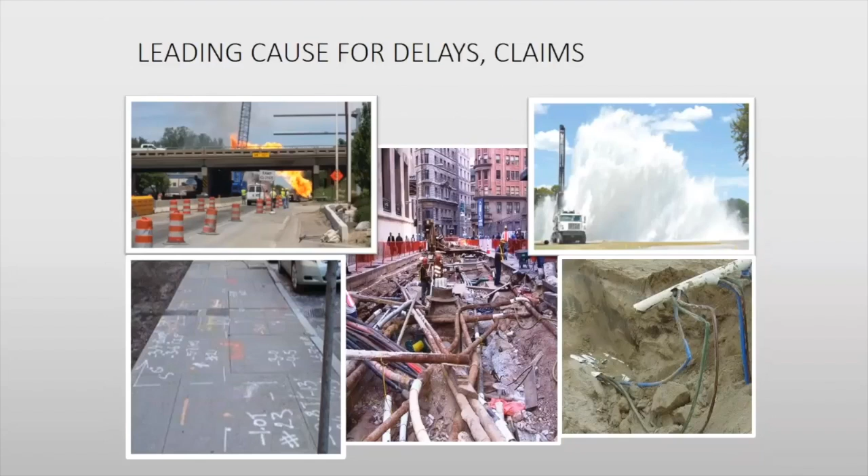It's a worldwide problem. So ASCE, basically the Construction Institute and the Utility Engineering and Survey Institute, got together—we actually started out of the Construction Institute—to come up with practices that would mitigate costs, save lives, and save money and time.

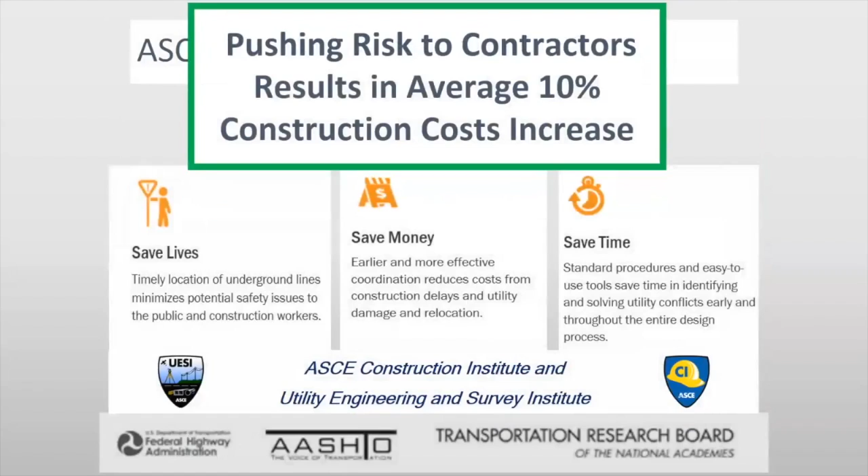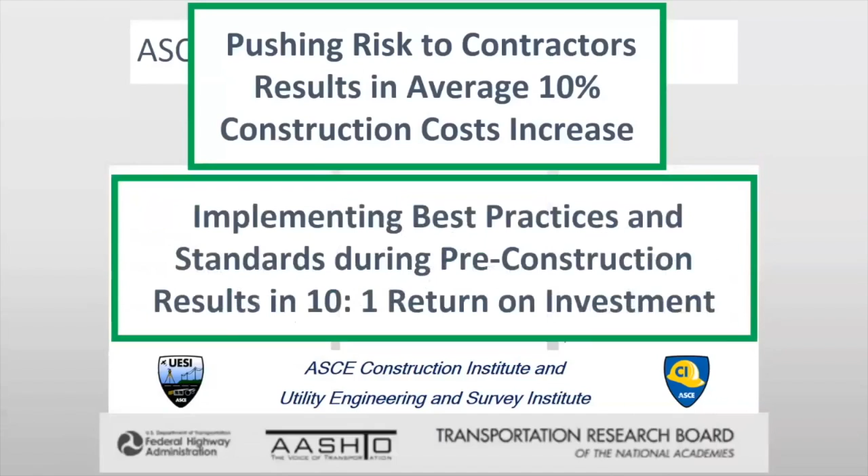The idea is to take the risk back, because when you push the risk to the contractors, they inherently put about a 10% contingency in their bid to deal with the issues. If we can deal with it up front, similar to the practices Drew is doing with his design work, we can achieve huge return on investment. I think Alan alluded to that.

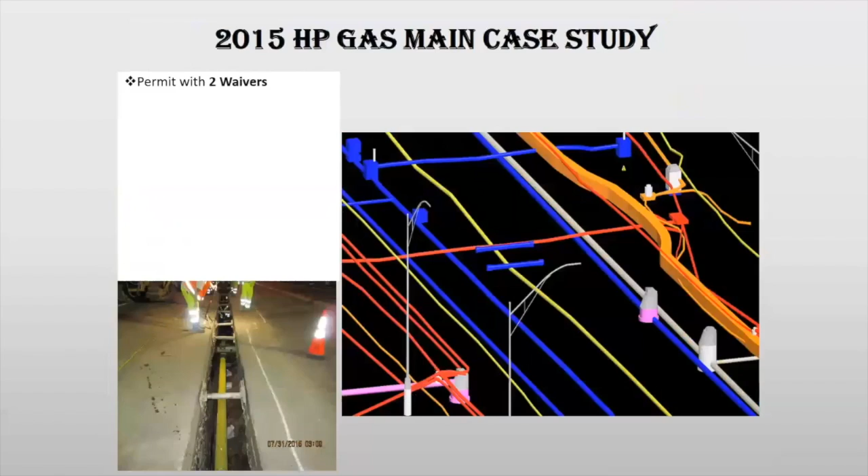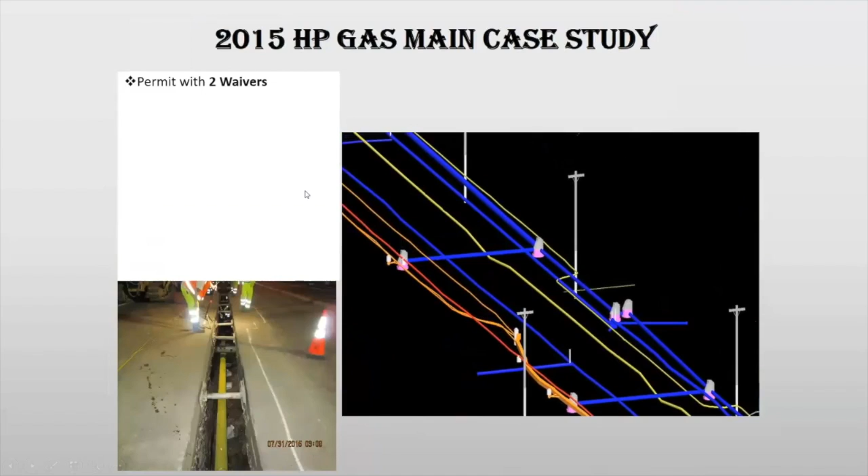This is a great example from 2015, only 4 years ago, of a 3D project where we used ASCE 38 to collect information. I just want to run through this. The project reaped huge benefit. One of the contractors that saw this information—we used ASCE 38 to collect the data and do all the conflict analysis, data collected by professionals.

Mike's going to talk about ASCE 38 in more depth, so I'll stay at a high level. But the bottom line is, you implement the standard, and the contractors looked at it and said, 'this is the best bid package you've ever seen.' We had that stated. The bids came in 10% below the engineer's estimate.

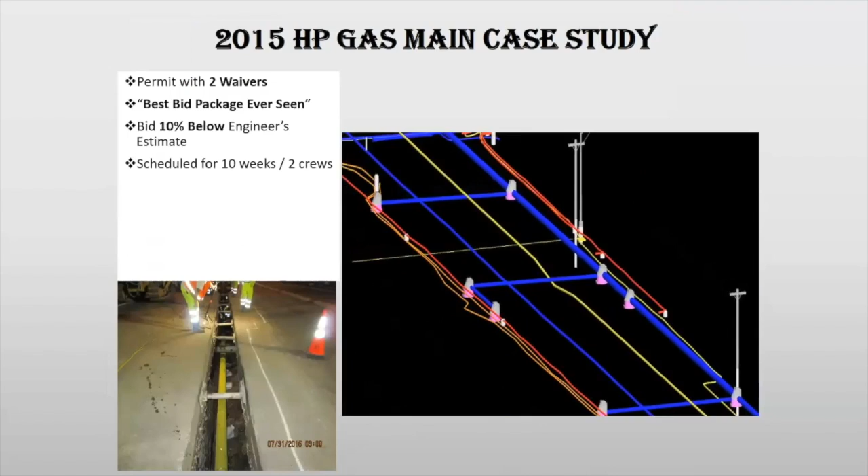This is a high-pressure gas main along a 1-mile corridor in Lacey, Washington. What was very impressive is that even the contractors didn't realize what they had here, so they still bid the work with 2 crews and 10 weeks to do it. But when they got out there, they were laying 300 feet of pipe a night because the information was all figured out ahead of time.

The risk was out of it. Everything was exactly as it was designed in 3D, and so they built it in 7 weeks with 1 crew. Now, you do the math on that—it's incredible. There were no damages, no change orders—that was another first—and no delays. It was built exactly as designed when we were done.

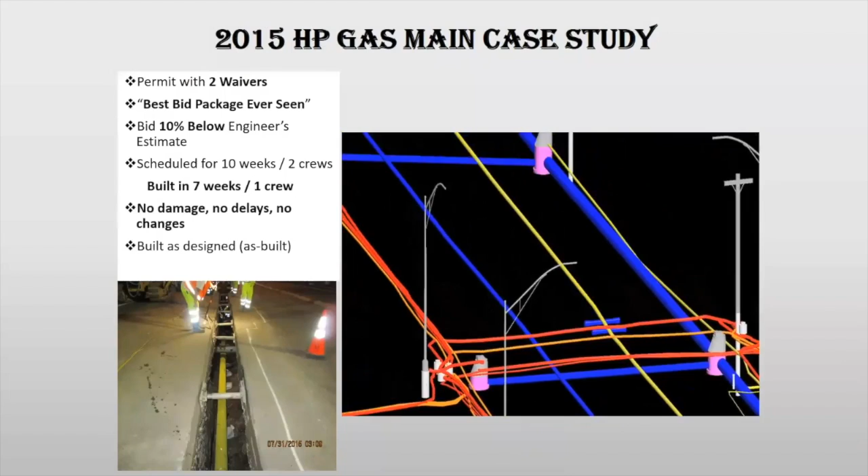ASCE 38 is a tremendous standard. It elevates the effort to a professional level, instead of the willy-nilly effort that was done in the past.

Now, what's interesting is we need policy change—my timer's on, I'm sorry. The state of Colorado, this has been adopted as a best practice around the country, but the state of Colorado, just in August, passed Senate Bill 18-167. They've actually made it a law now, requiring ASCE 38 on all project development. As I mentioned, Mike will talk about this a little later, but it's rocking around. It's going to keep me on timer.

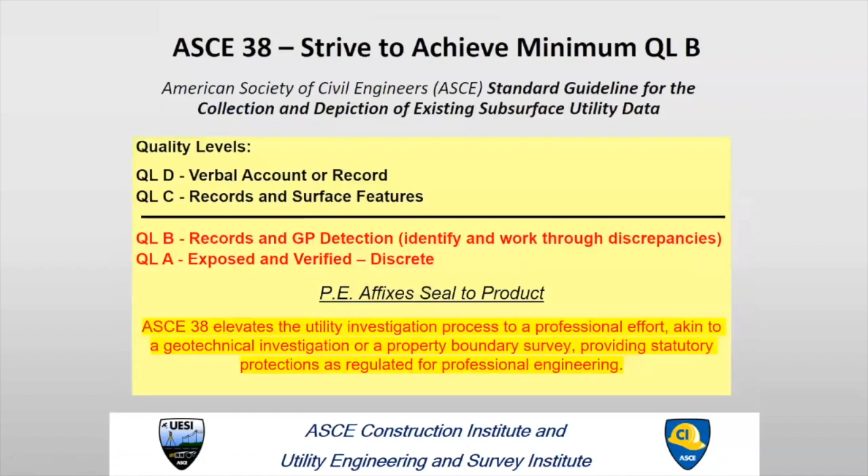The difference with ASCE 38 is it makes a professional engineer certify the product. That's because you're dealing with disparate data, public welfare, and protection of the public, and the statutes are well established for professional engineering to protect the public against malpractice.

Now I want to talk about two standards. ASCE 38 is one, and that resolves the symptoms of having bad record data. Nobody has good records, though some gas companies and water companies are getting better. But bottom line, there was a lack of a standard for as-built, so ASCE 38 was developed to address that.

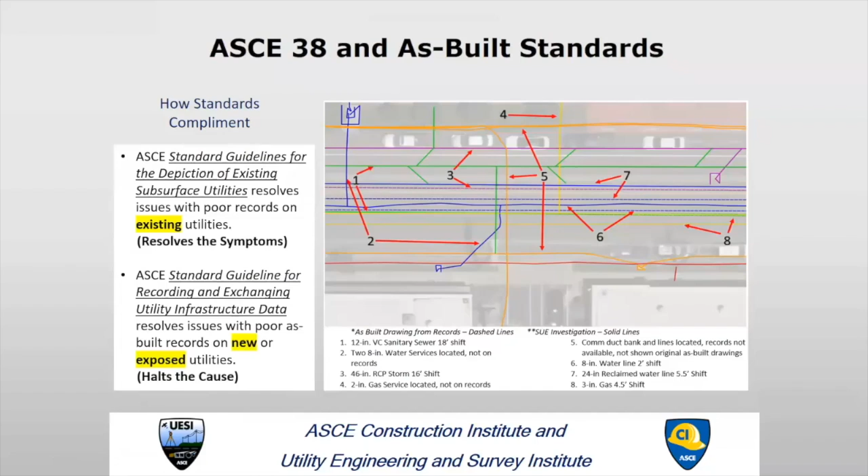This new standard, which I chair, is a standard guideline for recording and exchanging utility infrastructure data, an as-built standard. We've got DoD, FHWA, Federal Aviation, NOAA, Vermeer, Kiewit, Bentley, and Esri, and a number of players involved. It's a nice little standard, and OGC has adopted it as part of the MUDDI effort.

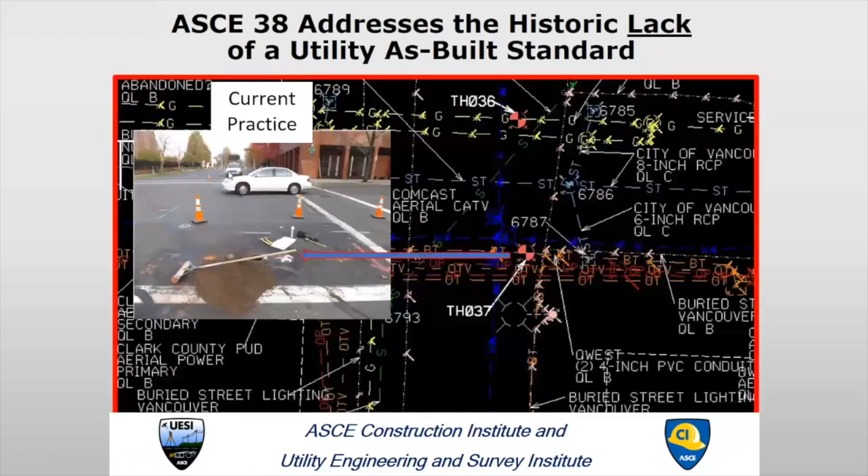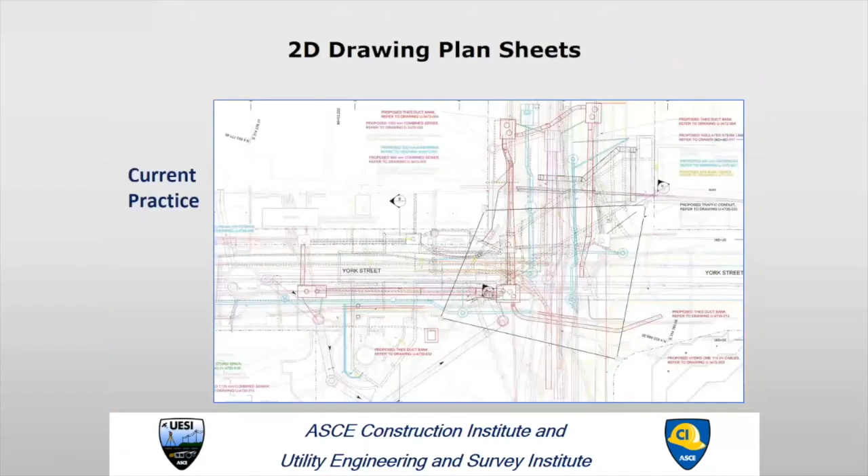The idea is to get from having to dig things up to find it, to keeping track of it when it goes in the ground in the first place. A novel idea. The other advantage is it might be better as a drawing—we want to go from 2D to 3D.

The as-built standard addresses how much data you need to collect to go from here to here. Now everybody can look at this and understand what's going on—you don't have to be an engineer. What's great is now it's easy, you put your Google glasses on, you go out and see the stuff.

I think you mentioned that—wouldn't it be great to be able to go out and see this stuff for damage or emergency response if you had that kind of data. So, with us or without us, it's like a Tom Cruise movie.

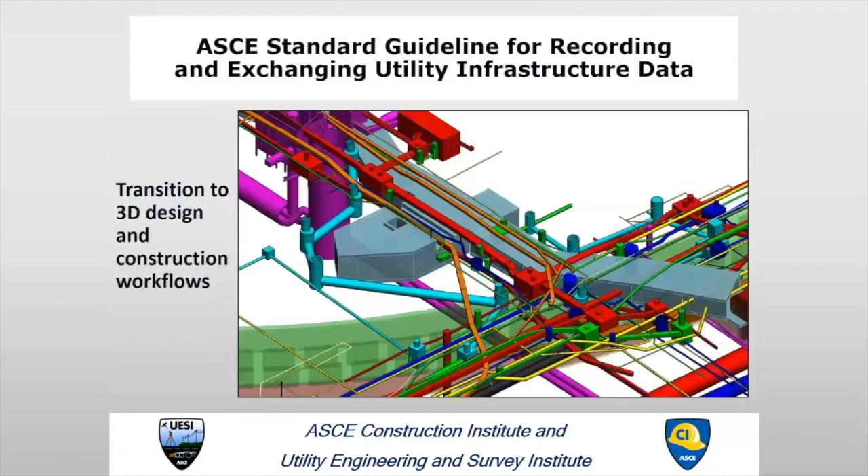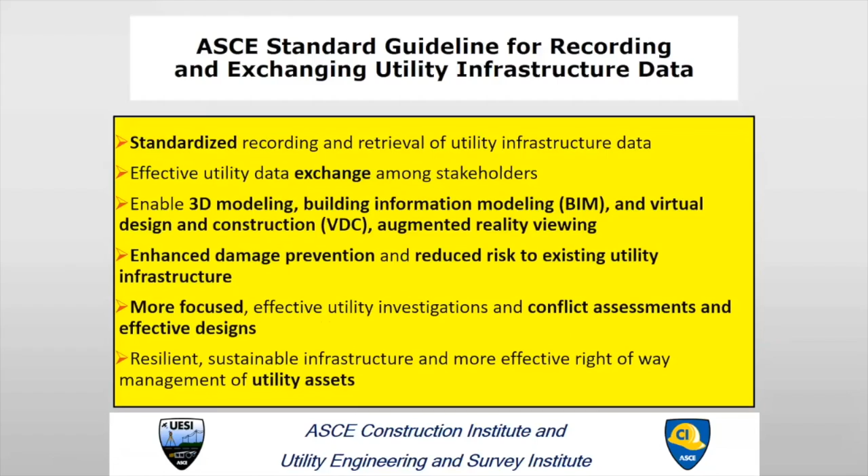The new standard for recording and exchanging infrastructure standardizes how data is recorded. It's going to make effective exchange among stakeholders possible. It's been 6 years in development now, and we're in the final balloting of it right now. It enables all the VDC things we want to do, and there's all kinds of benefits.

What's going on here is really exciting to me because you guys are going to leverage the data. So this is just showing some of the technologies.

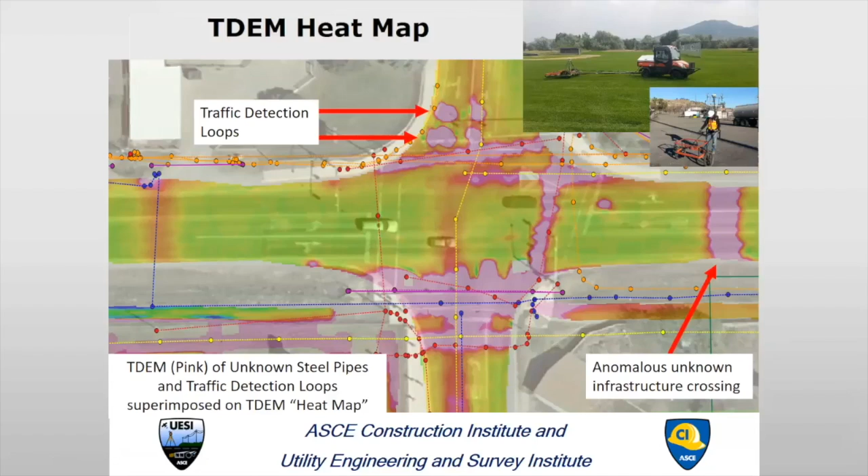One thing we're doing now that we couldn't do 5 years ago is using special geophysical methods—we can basically enable what CT scans and MRIs did for laparoscopic surgery. That's what we're doing for engineering. We can visualize these things now.

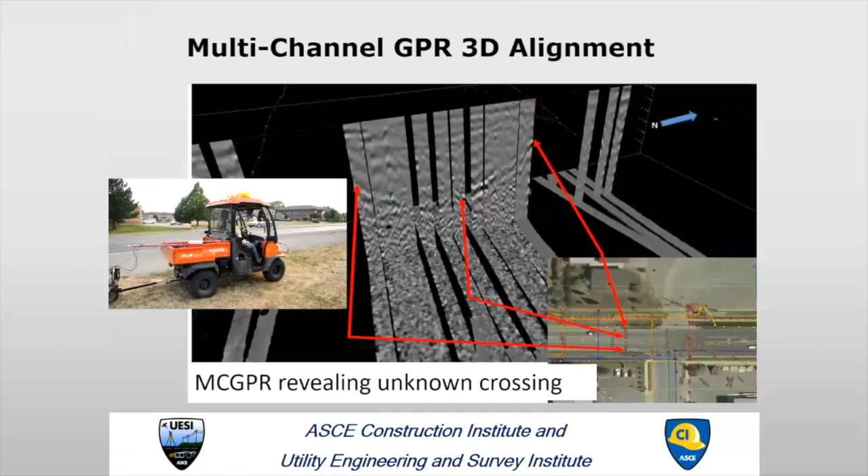But the key, and ASCE is trying to address this, is you have to have qualified people doing this work to collect and interpret that data. It's not something you can just hand off to anybody. You have to make sure you have pre-qualified people doing this—just like a radiologist, you don't want a technician analyzing that information and creating a model out of it.

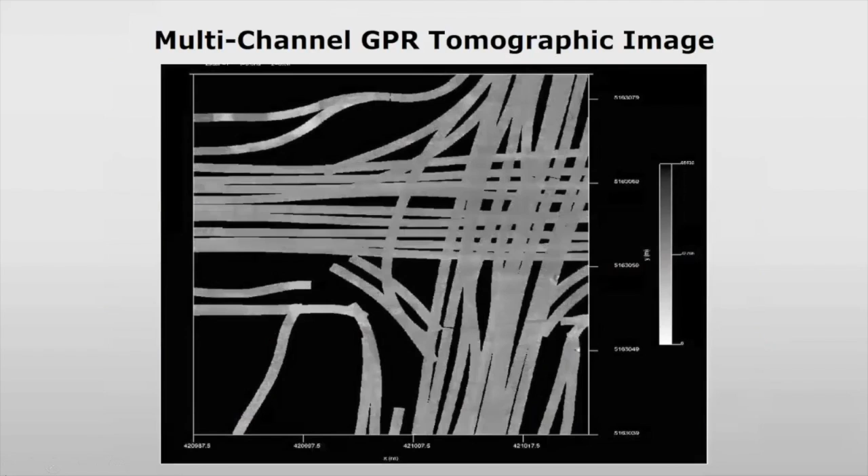So we can do things with this multi-channel radar. You can create tomographic images, basically looking at time slices in depth. This is showing how we're following a pipeline along in the radar here.

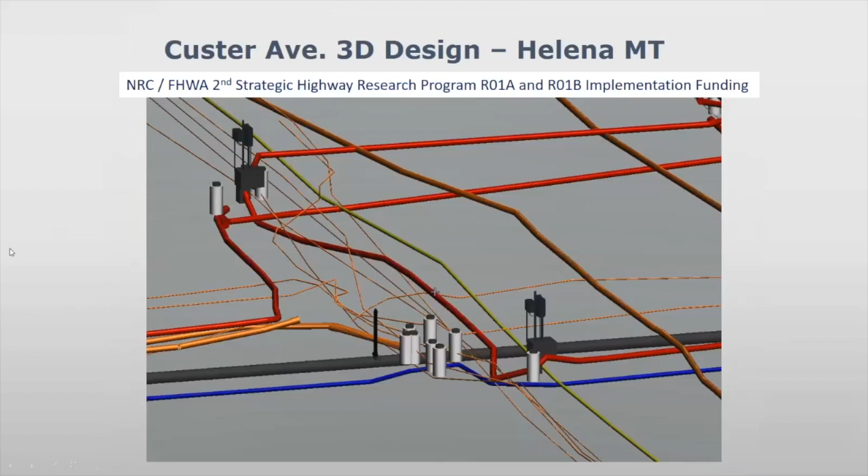I'm just going to keep going here. This is a project hot off the press—it was just done this fall, and this is in Helena, Montana.

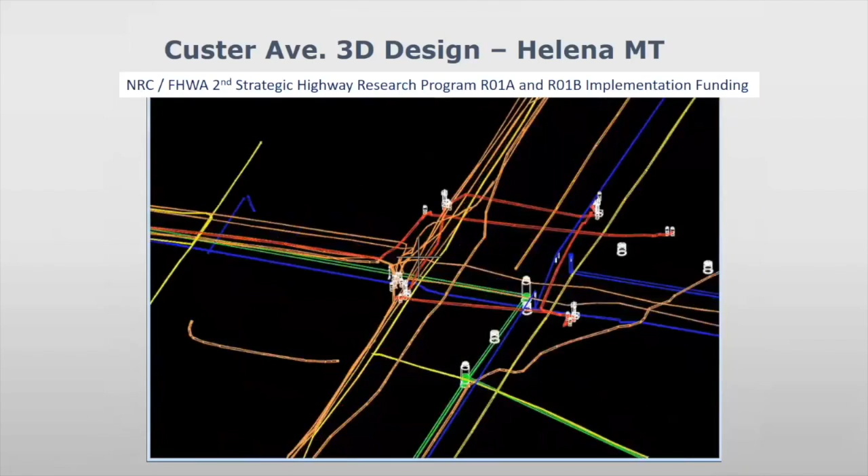It was funded by the Strategic Highway Research Program, which is a national research effort funded by the National Research Council. It's just to show how we could collect data and build 3D models, and it's really not that difficult to do with the information.

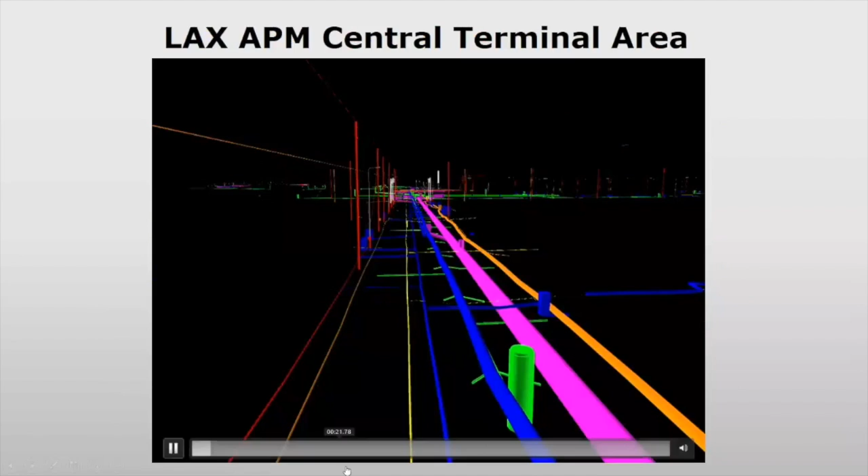And this is another project that was done. This is LAX, where this model went into the bid package. Now the key is, we're also using LiDAR and things like that.

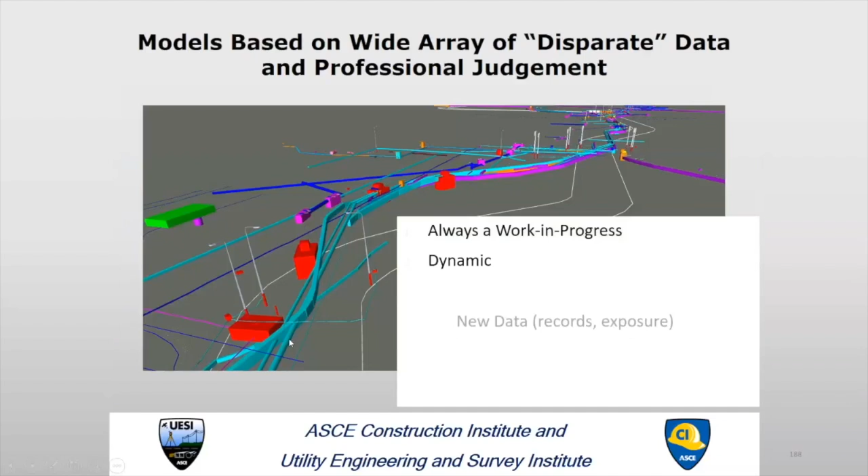So what you have to understand when you bring utility data together to build a model is it's not a trivial effort. You're going to have disparate information, and it's going to be a work in progress and dynamic, because people are constructing and you're going to get more data.

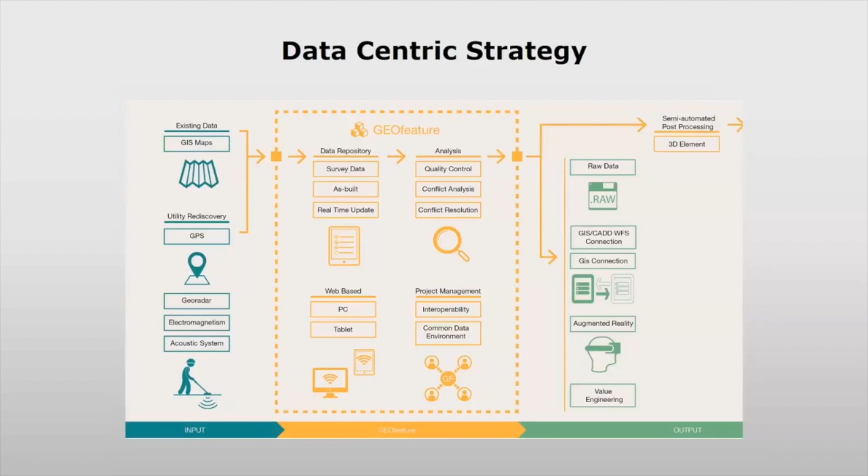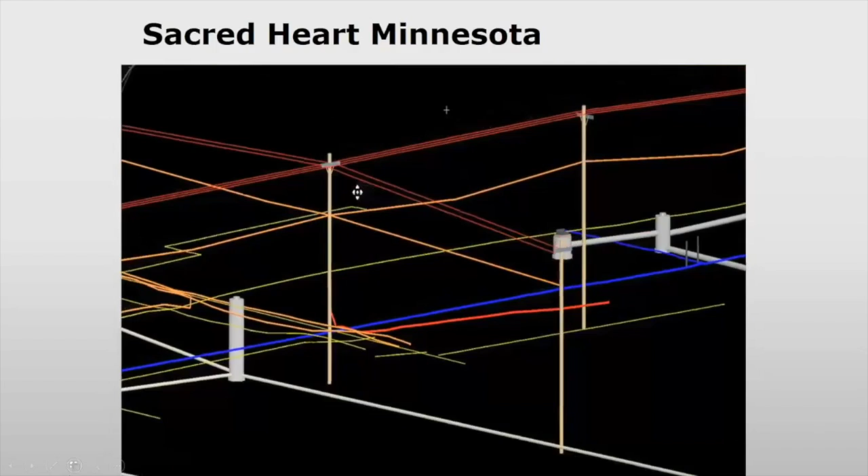You have to manage in a data-centric environment, and build your models. But also you have to implement as-built data so you're keeping your data current, because it's changing as you go along. Construction is going to change things. One of our major contractors said 70% of their strikes are on infrastructure that they actually installed themselves.

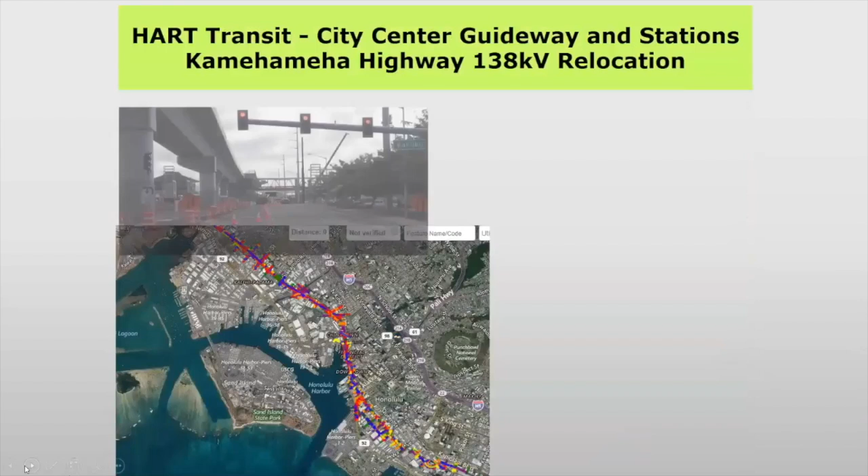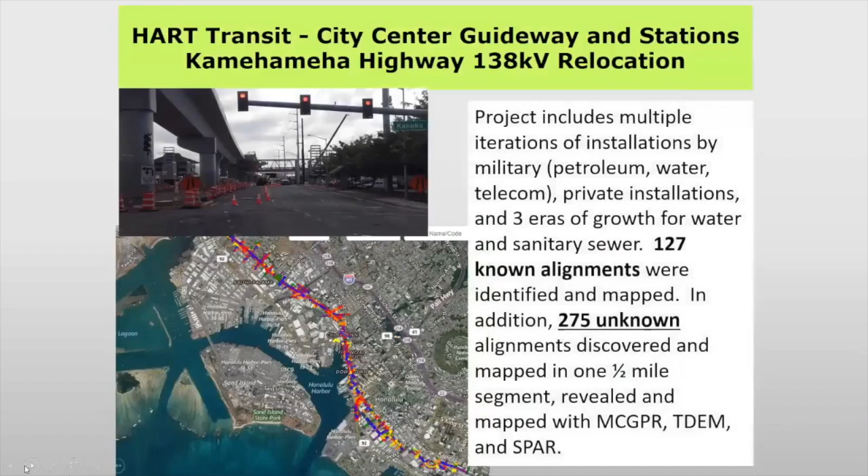So anyway, this is hot off the press, the Honolulu light rail project. What we can do with the data is not only identify the known infrastructure, but we're identifying a lot more unknown infrastructure, and having all this information up front makes the project go a lot faster.

These are just stats showing it. Alan, I haven't shared these with you yet, we just got these. But some more value - one of the challenges is going to be, how do you document stuff that didn't happen because you had this data?

How are you going to show the value of doing this when things don't happen because you had this data? So we'll have to figure that out.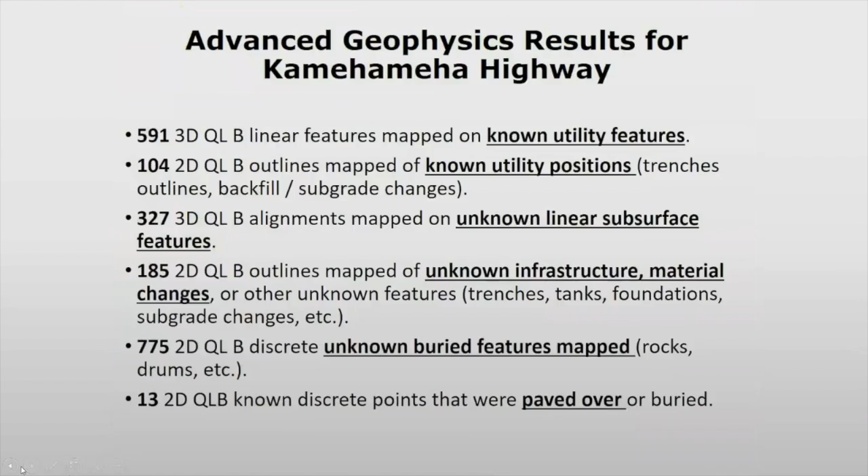Now, one of the things that happens right now with this information is when you push the risk to contractors, the bid languages are wrong, because most projects like light rail are pushing all the risk to the contractor. They're letting the contractor deal with it.

We're doing a potholing campaign, where basically they go through a hole every 25 feet digging everything up. And it's not written to incorporate this data early and actually include it in the project development. So we're not getting the value out of that.

There's a problem because people administering these contracts don't care. They think it's a utility problem, not their problem. Well, it is their problem because it's their project and it's going to affect all the public.

And then they think the utility should have this data. Well, we don't, because we didn't have a standard, and they think it's a contractor role. We've had prior bad experience with doing this, with radar and things like that. But again, the technology has advanced.

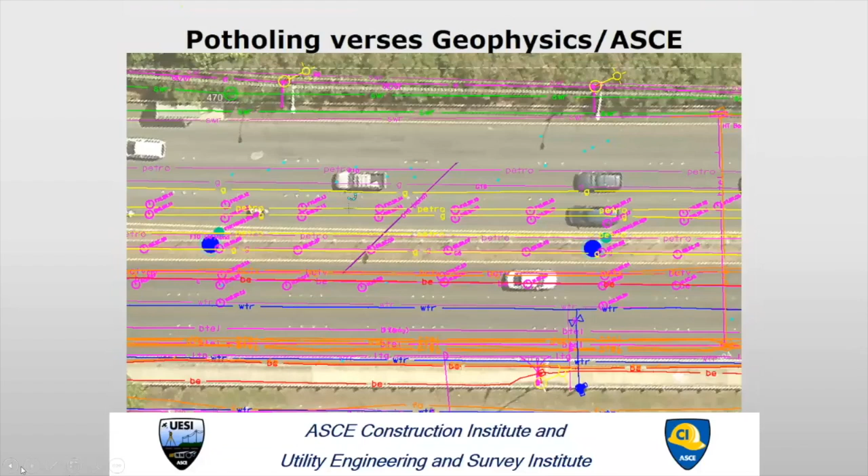But the keys are having good pre-quals and good bid language and things like that. So what we have to do is evolve our projects so that for a transit or light rail project, you get data, get it leveraged for the project, get value out of that, keep that data, implement as-built, and keep that data current so you have it for operations and maintenance going forward. That's basically the key out of all this.

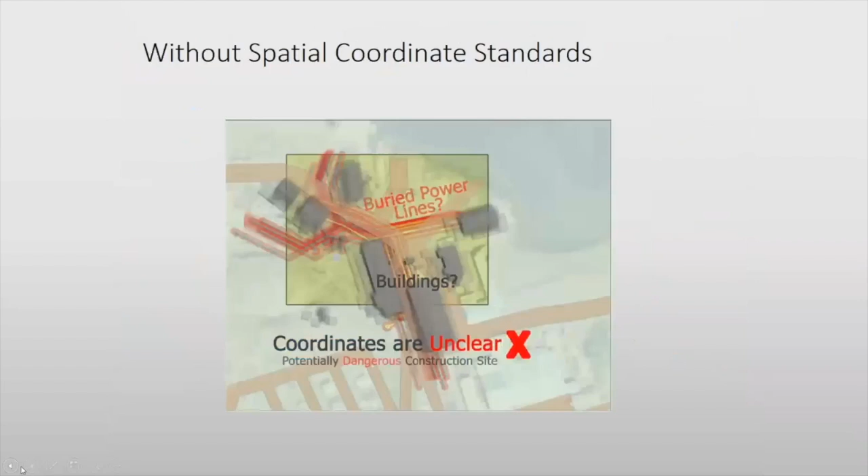One question that came up is, are you now providing contractors a CAD model as part of the bid package? Yes, actually we provide a 3D BIM model. The best thing is a 3D CAD model that can be pushed into a building infrastructure management system, and then they can build it all in a virtual sense and understand where the risk is and how they're going to stage things.

And working with utility infrastructure just opens up - there's a lot of pitfalls in it if you don't have that information.